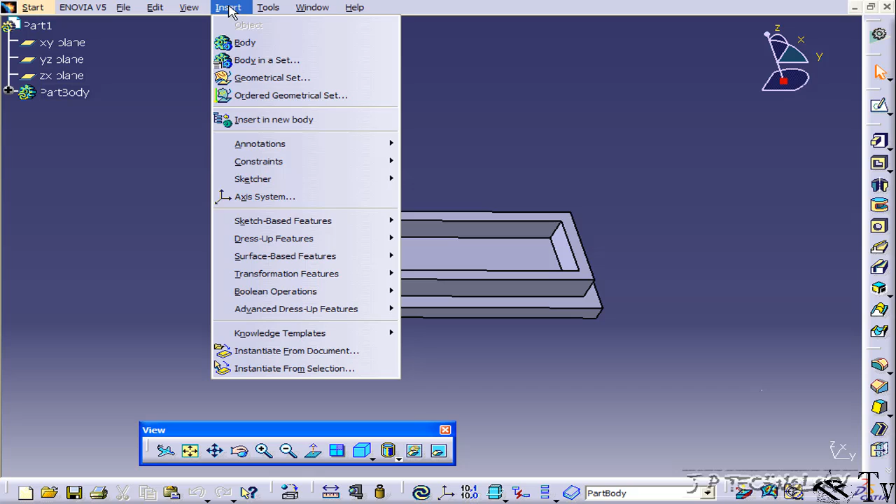This is tutorial number 48, and it covers how to use the rib feature within CATIA V5. To start off, open up tutorial part number 48, which is located on the DVD. Now the rib feature is found on the toolbar on the side here, or if you go to Insert, Sketch-Based Features, Rib, you'll find it there too.

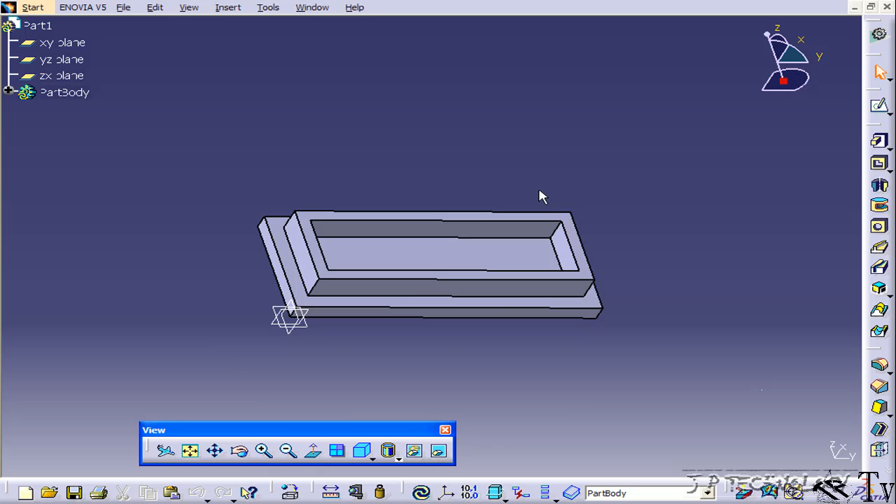So with the rib, what you need is a sketch profile, and you also need a path for that sketch profile to follow. And what you'll get is an extrude of that profile along that path. So what we're going to do is create some profiles and paths inside of this box, connecting one side to the other. So to start off, let's sketch a profile onto this face here. So let's click this face and let's click Sketch.

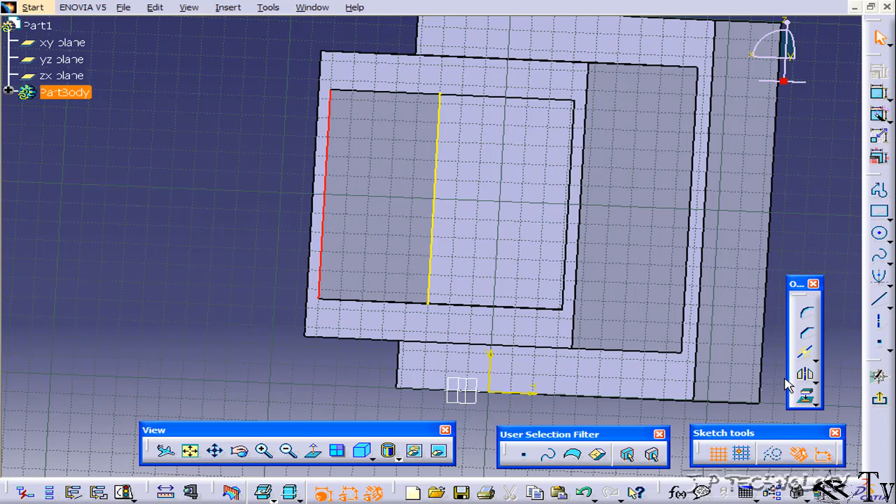And let's click the bottom edge and extract it. Click the top edge and extract it. And we'll click one of the side edges and extract it. Now let's click the rectangle and let's draw a rectangle on there. Now let's dimension this rectangle to 30.

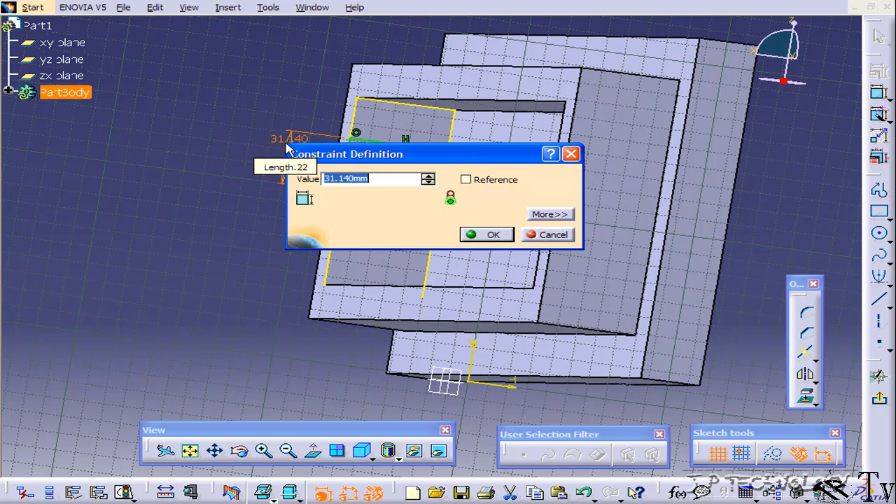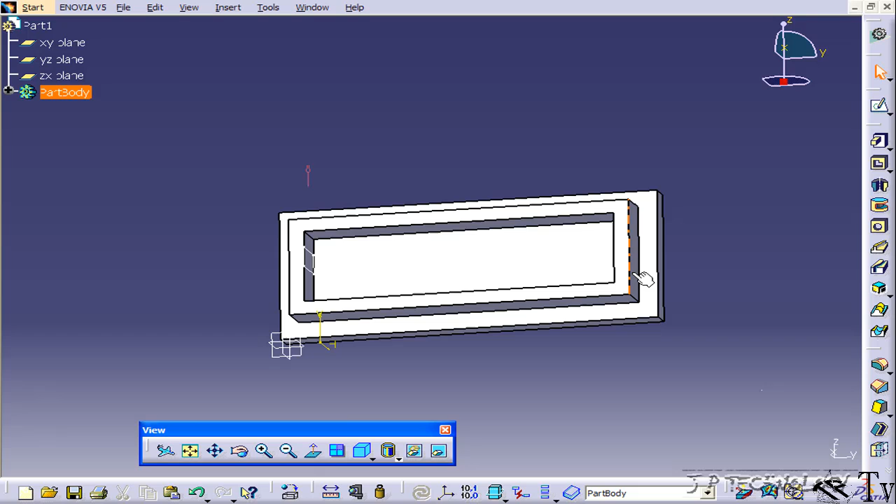And now let's click all of these lines along here and turn them into construction lines, just so that when we extract the profile, we're only getting the profile and not the construction lines. Now let's go back to the other workbench. And now we're going to create a simple path for it to follow across. So let's click this face here, click Sketch, and then let's click this line here and this line here, extract them out, and turn them into construction lines.

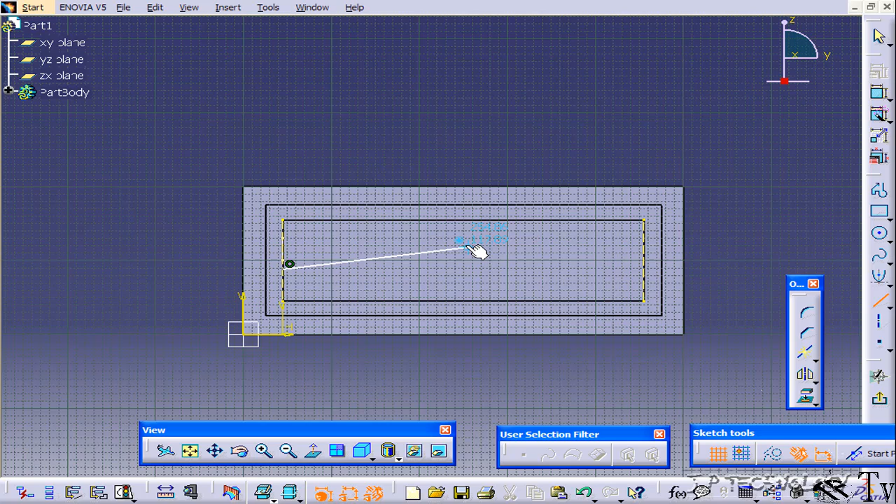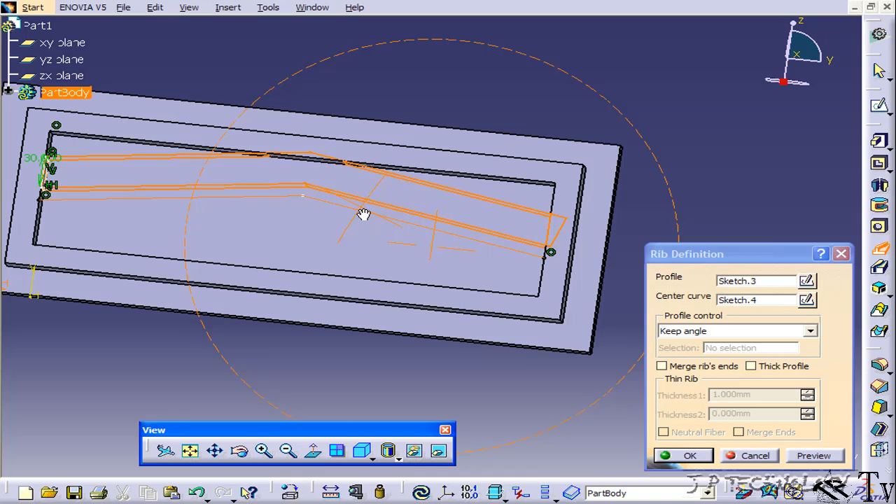Now again, let's choose the line, and we're going to just draw a simple profile across. And let's go back. So now what we have is our profile and our path for it to follow. So let's click Rib, and let's select the profile, and now our path for it to follow. And you'll see a preview of it going across. Now let's click OK, and now we have our rib running through our part.

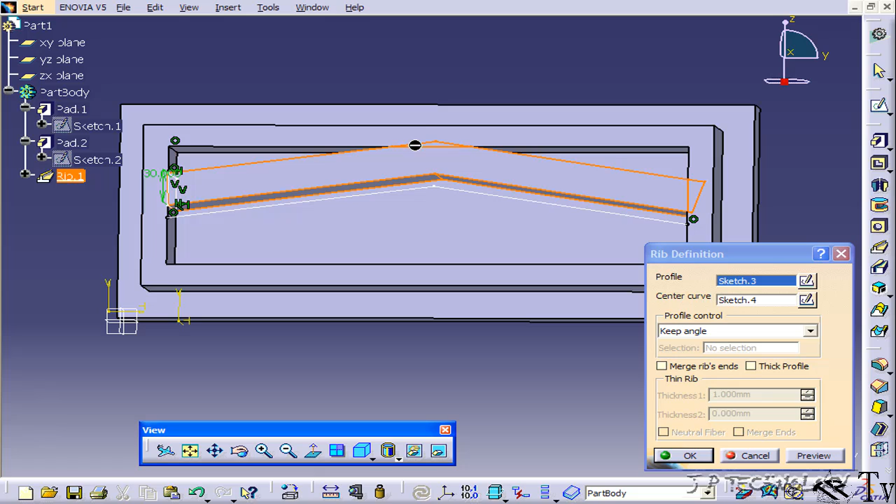Now let's open up the part body and let's double click on this rib. Now there's some more definitions that we can play with. If you look at the rib, it's flush here and it gets exposed and goes over the line here and over the line here. To get rid of that, you have to click Merge Rib's Ends. So click that, and it just trims it up nicely. Uncheck, and it's exposed and it's over the line. So let's trim it, and click OK. So now we have a nice trim profile, and everything fits in nicely.

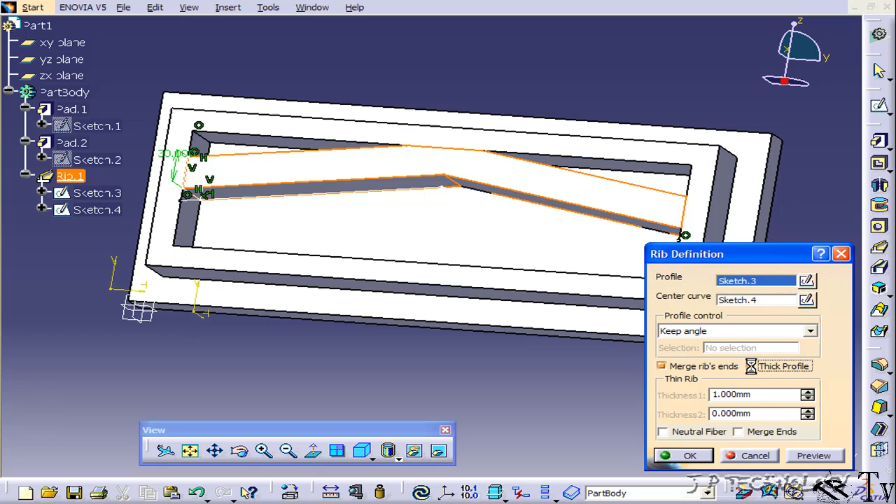Now if we double click on this again, you're also able to do a thick to the rib. So let's click Thick, and let's put it up to 5 millimeters. Click OK. And this is going to work just like the other thicks that we've done. So inside it's going to be hollow.

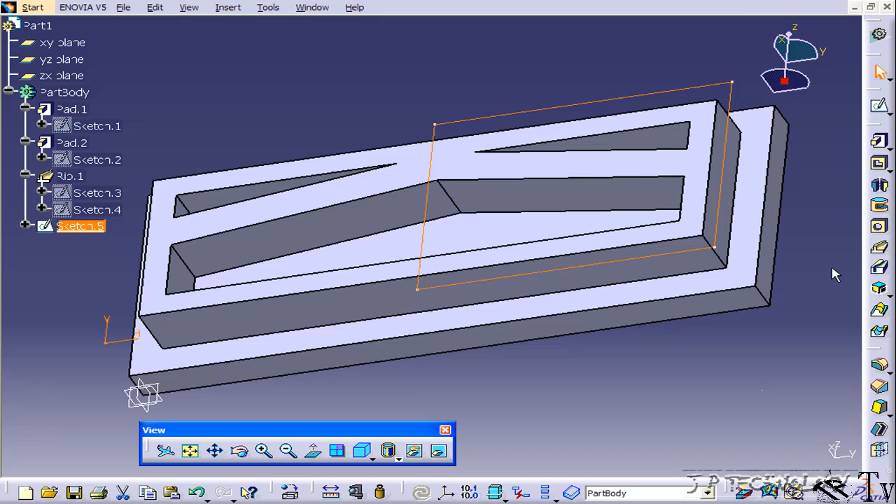So to see what it looks like inside, let's click this face, click Sketch, and we'll just quickly cut out a little section here. And we'll use the pocket just to cut it out. Click OK. And you can see that we have a hollow center in there. So using the thick feature, we're able to create a rib, kind of like a structural member across, that's hollow inside. Now let's press Ctrl Z to put back that part and get rid of that sketch.

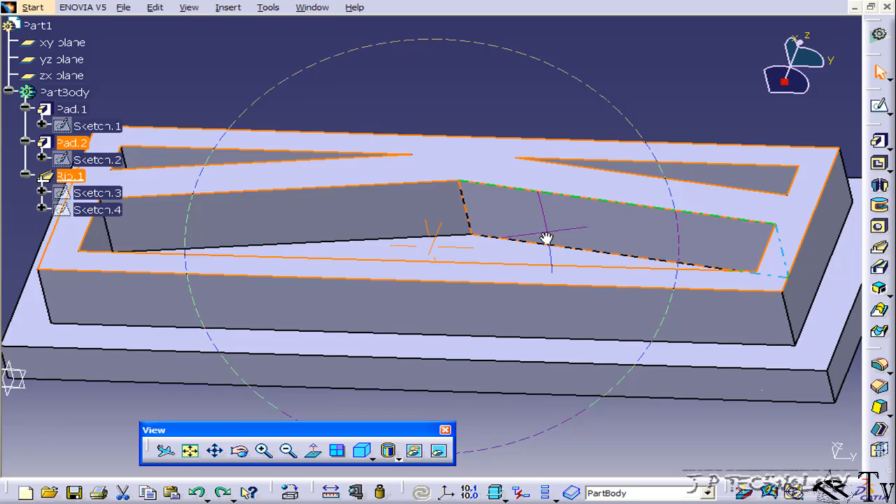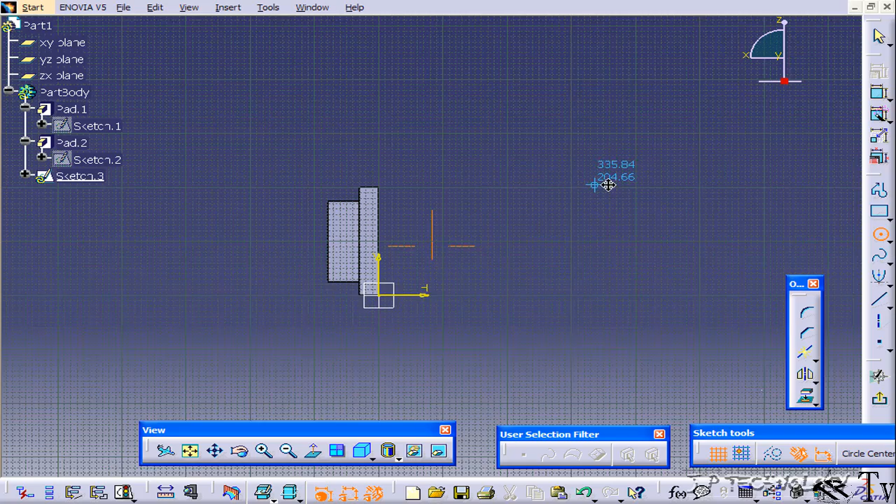Now we've been able to successfully make a square or like a rectangle follow this path here. Now we're going to try a different shape. So let's just delete this rib right now. Click OK. And we'll click this face here, click Sketch, click the circle, and just draw a circle anywhere inside of here. And we'll go back up, and we'll make another path for it to follow.

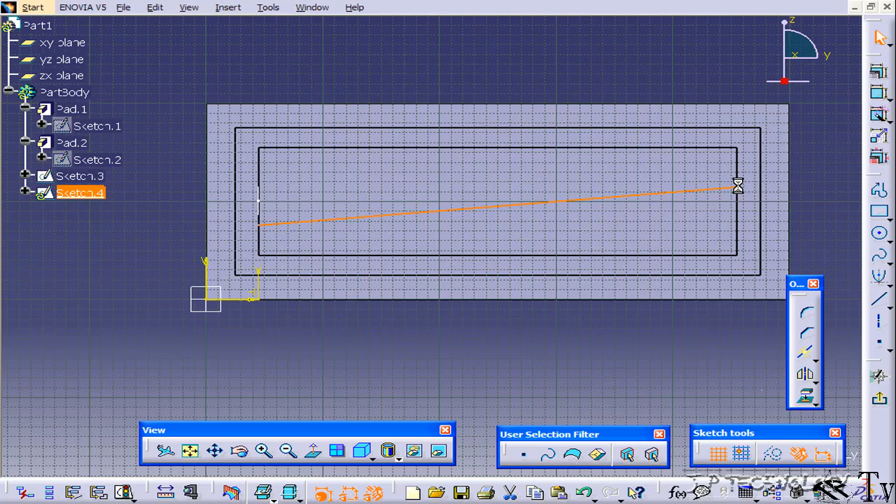So we'll click the top face here, click Sketch, and we'll just draw a line straight across. We'll go back, and now we'll use the rib feature. So let's click Rib, click the profile, click the path, click OK, and now we have the circle as a cylinder going across as a rib. Now you're able to do any type of profile, and any type of path. So right now we just did a straight line.

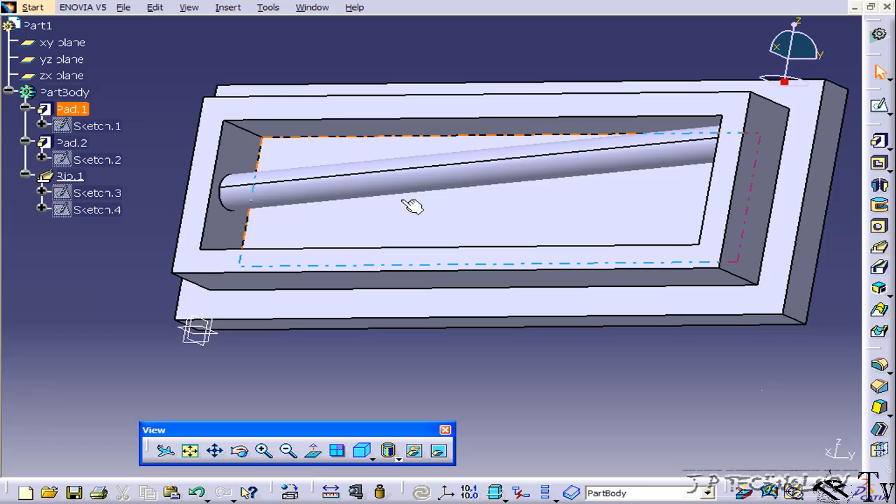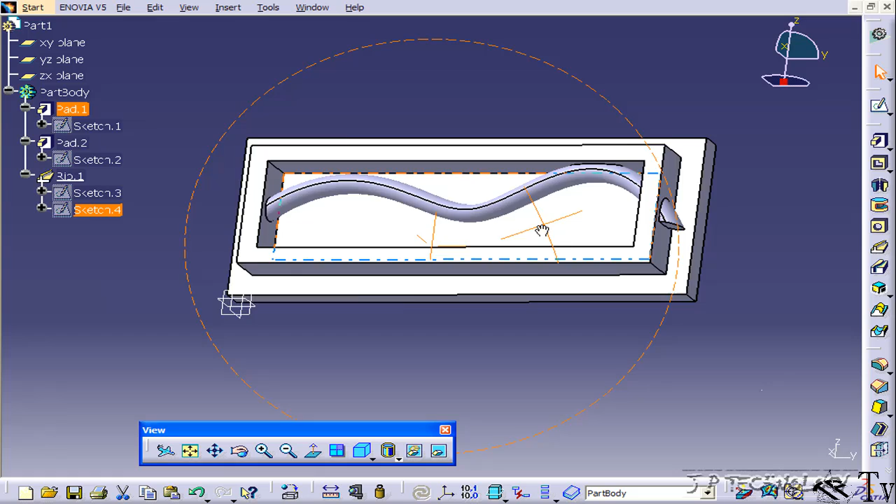Now let's put in a more flowing and more organic line in there. So let's double click the fourth sketch. Let's delete it. Let's click the spline tool and just bring in a more organic and curvy spline. And we'll go back and let it rebuild. And you can see how it's gone through. Now let's double click on the rib and let's just trim up the edges there. Click OK. And now it's trimmed it up so it's inside and contained.

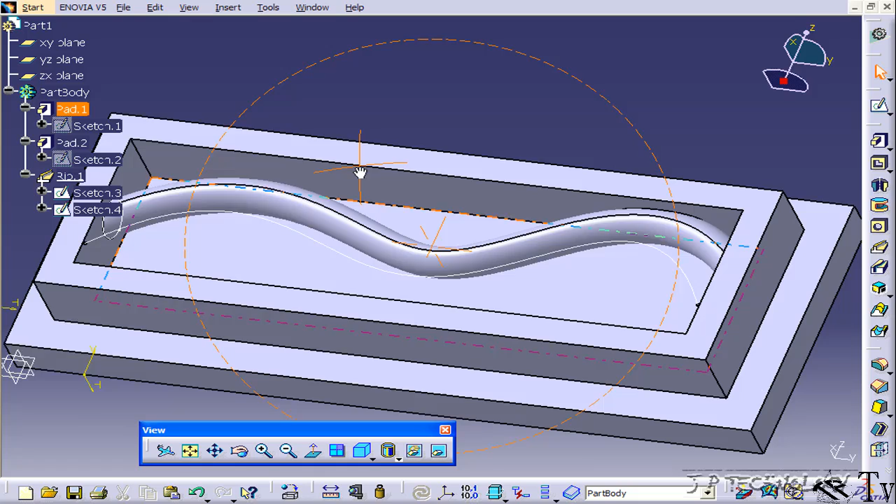Now open up the rib and let's show the sketches that we've been using. And if you notice, this line here is not actually touching the rib that we've cut out. So the sketch that you've made is going to automatically shift up or down to wherever the profile that you're going to use is. So as you can see, this has been shifted up to meet this profile and then follows that curve.

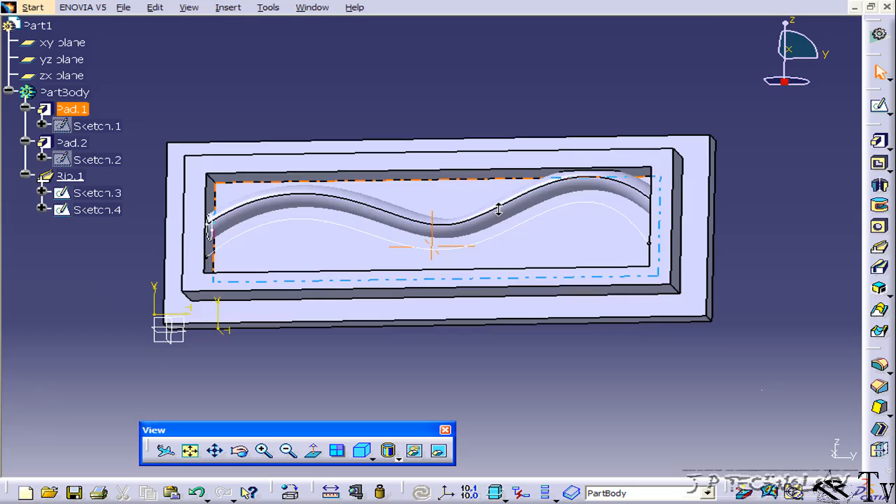So all you need to use the rib is a profile and a path sketch to follow along with. So you're going to need 2 sketches to use this tool. This tool allows you to create ribs in tighter spaces, and in spaces that would either take too much time to make or would be too complicated to make with simpler tools like the pad and whatnot. And this concludes our tutorial on how to use the rib feature within CATIA V5.